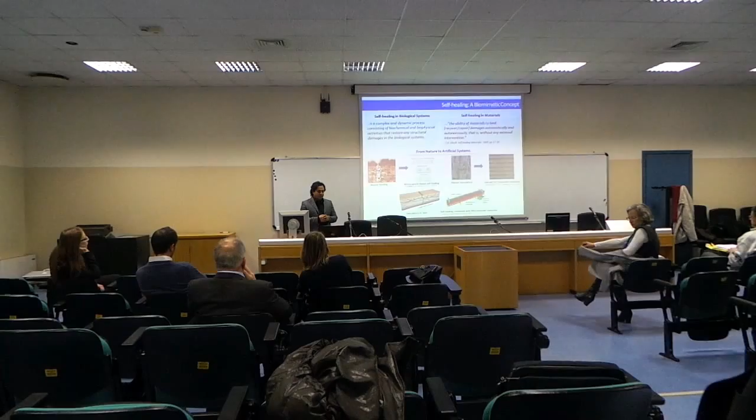So what is self-healing? Self-healing is a biomimetic concept because it's a unique feature in any biological system around us. Self-healing in any biological system can be defined as a complex and dynamic process consisting of different biochemical and biophysical activities in order to restore any structural damage in the system. Scientists have always been interested in replicating this idea to develop artificial systems with healing ability. The ideal definition of a self-healing material could be any material that has the inbuilt capacity to heal any kind of damage without any external intervention.

Over the past two decades, there have been a lot of research works in the scientific community to develop such materials with healing ability.

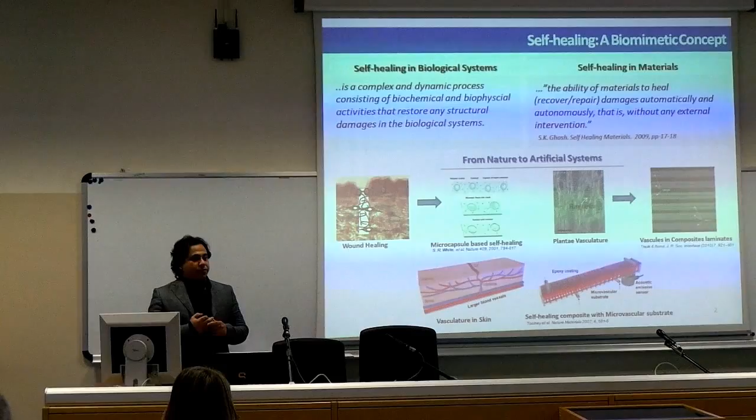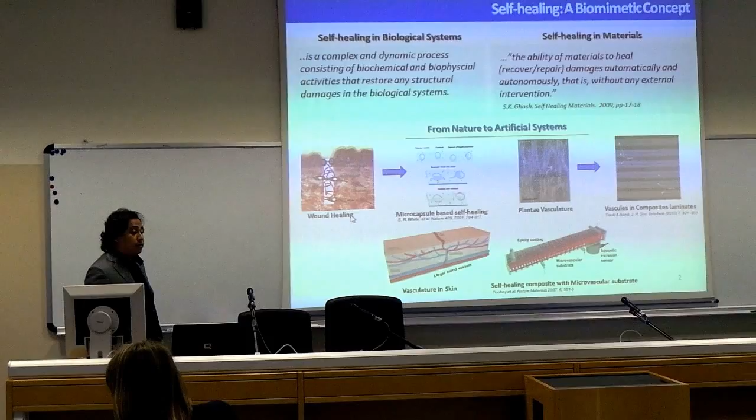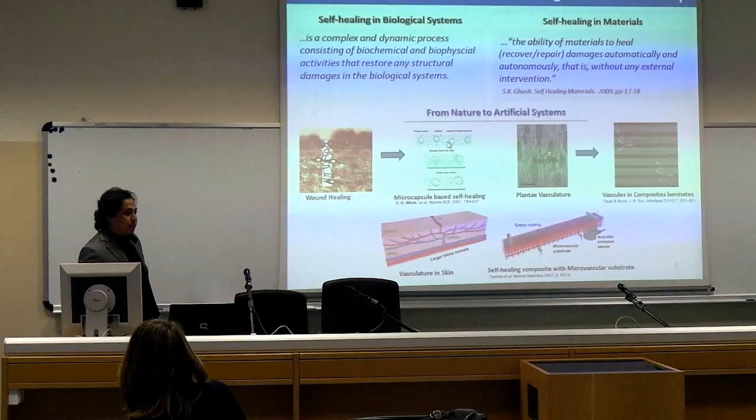For example, Professor Scott White in 2001 first published a work where they wanted to mimic the wound healing mechanism of human bone tissue to develop epoxy-based composites, embedding microcapsules containing healing agents and dispersing catalyst inside the matrix. Upon crack initiation, if the crack breaks the microcapsule, it releases the healing agent, and when it contacts the catalyst, it initiates polymerization at the crack, and this way they self-heal.

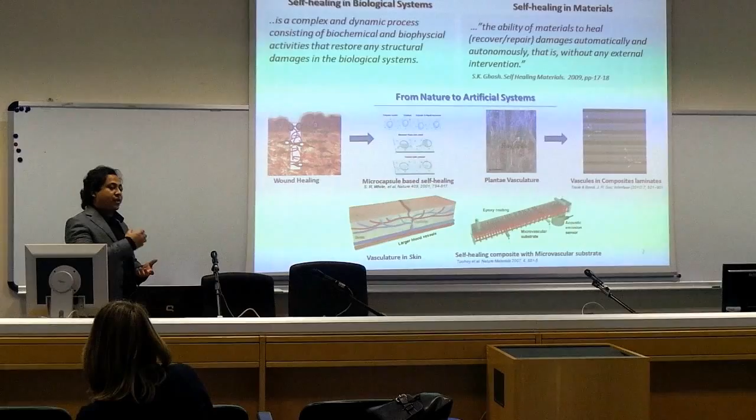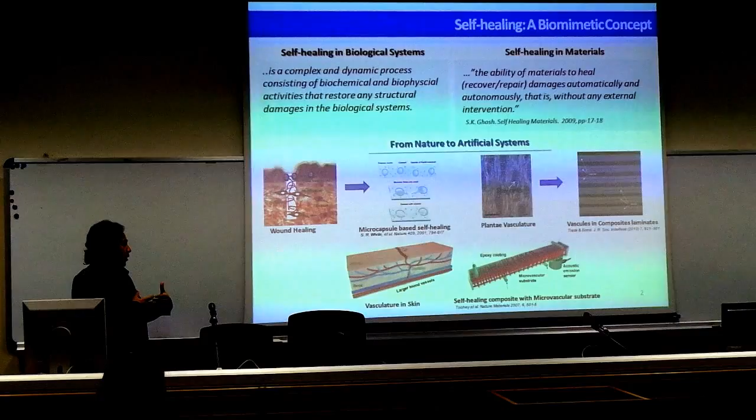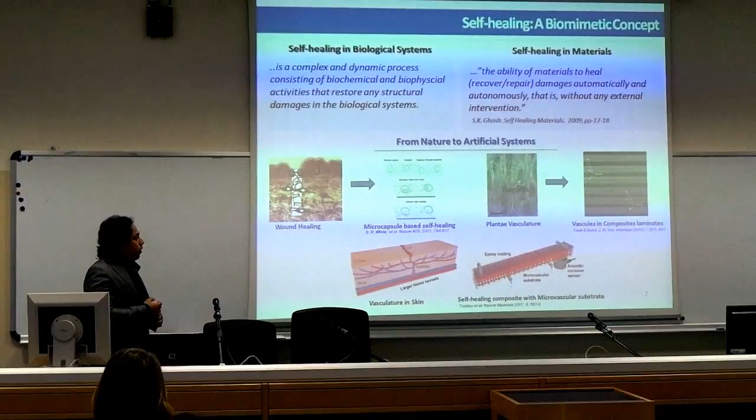Another interesting example is the work done by Professor Ian Bond at the University of Bristol. They tried to mimic plant vasculature to develop composite laminates, embedding hollow glass fiber containing healing agents inside. Upon crack propagation, the healing agents are released from the hollow glass fiber, and thus they self-heal.

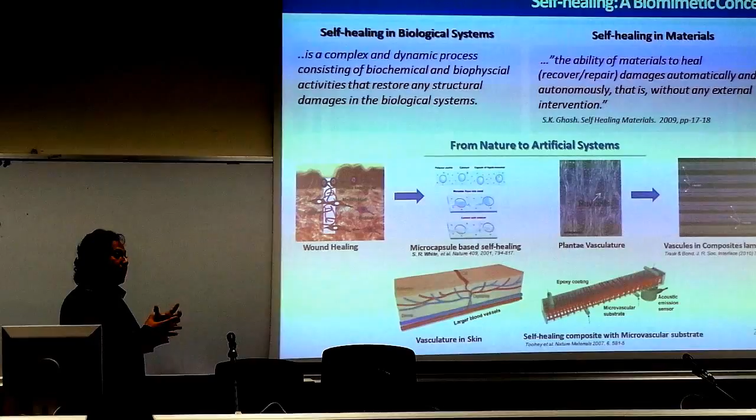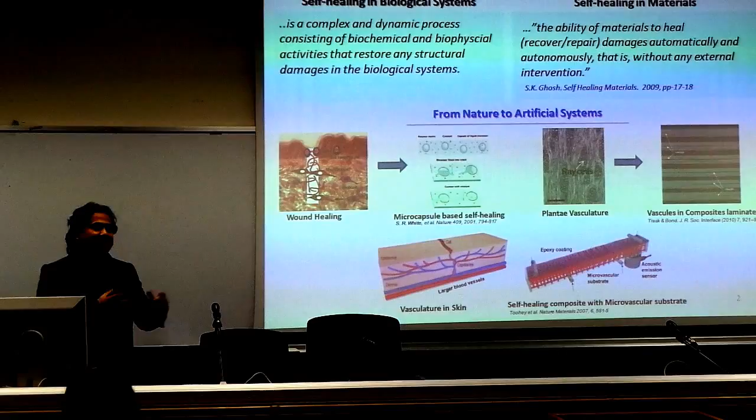Another interesting approach was developed by Professor Toohey et al., who tried to mimic the vasculature in skin, which is the blood vessels under the lower epidermis of our skin. They mimicked this network of blood vessels inside composites by embedding a three-dimensional network of hollow glass fiber. Upon crack initiation, due to internal pressure difference, the healing agents go to the crack and heal it. These are very promising extrinsic type self-healing materials. However, because of their very expensive synthetic route, they are still not very technologically convenient.

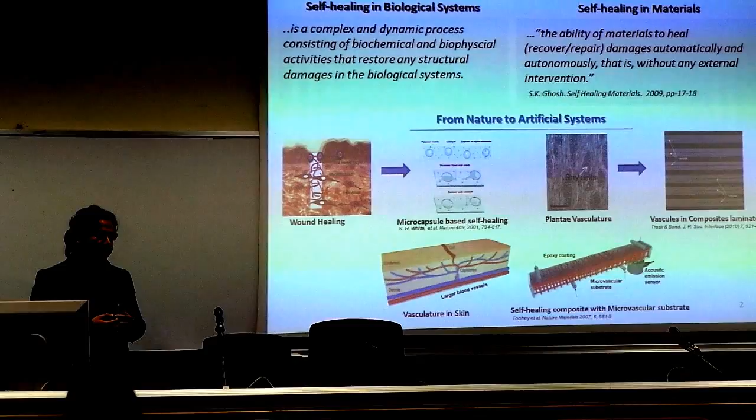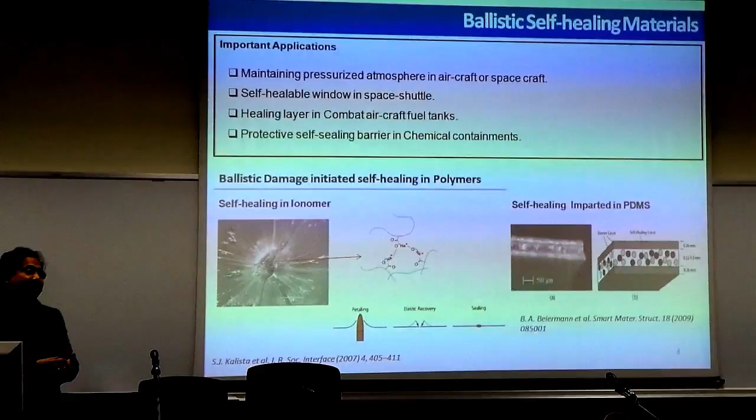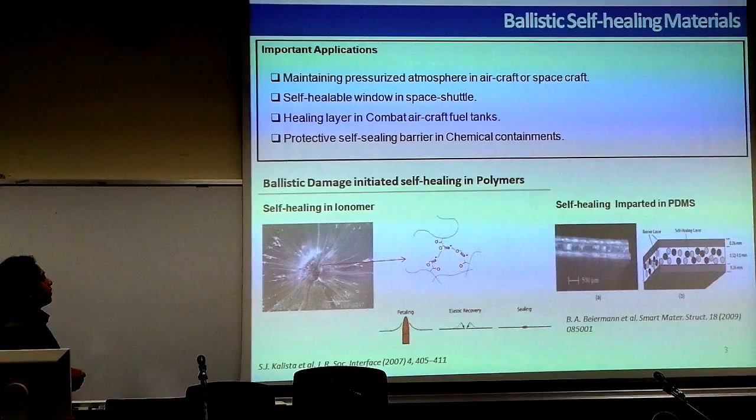There is another class of self-healing material which is ballistic self-healing materials, and I am working on ballistic self-healing materials. Ballistic self-healing materials are a class of materials that can heal very high energy impact damage. This kind of self-healing material can have important applications, like maintaining pressurized atmosphere in aircraft or spacecraft, or being used as self-healable windows in a space shuttle, and so on.

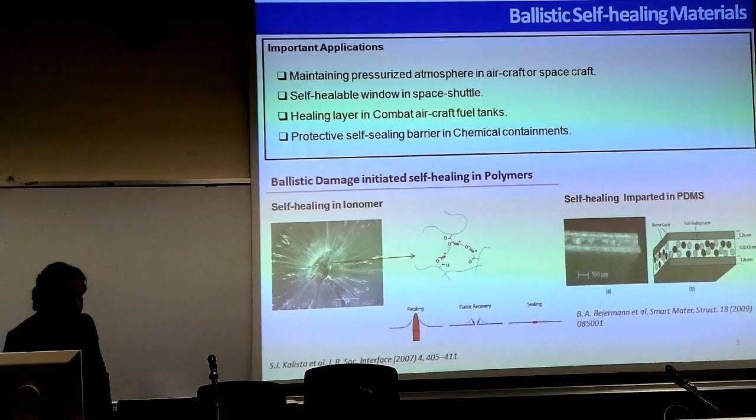The first research work on ballistic damage-initiated self-healing in polymer was reported by Stephen Kalista in 2007. He studied the self-healing behavior in ionomer, and proposed that self-healing in ionomer is actually a function of melt elastic recovery at the impact zone, with complete interdiffusion phenomena at the impact zone leading to complete self-healing of the sample.

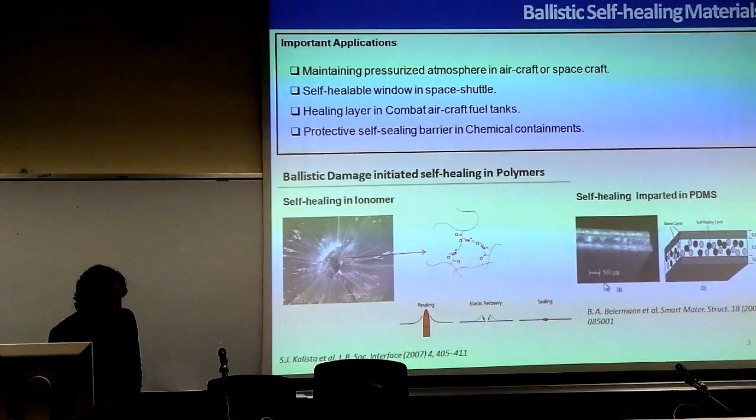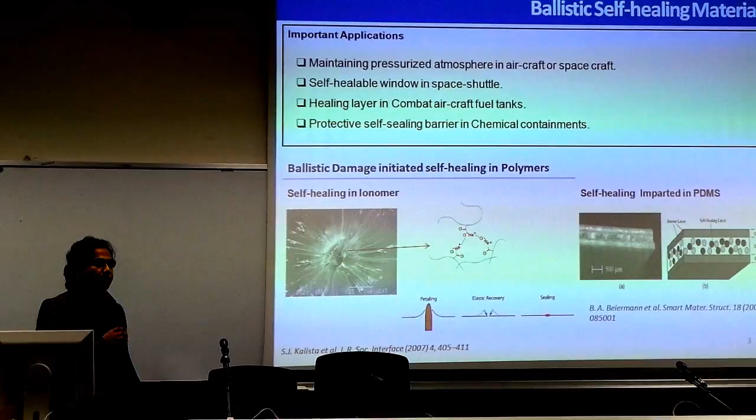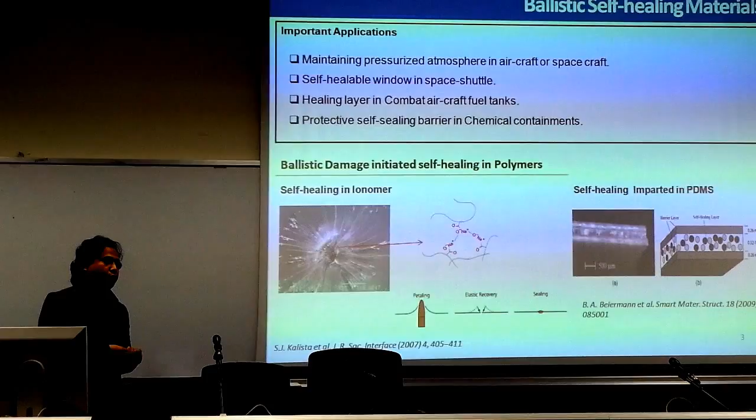After that, there has been very little work to develop such self-healing materials. For example, some efforts have been devoted to developing a self-healing material based on polydimethylsiloxane, where two different types of microcapsules containing healing agents were embedded inside the laminates, and this kind of material exhibited self-healing behavior at very low energy impact damage. However, there is still a search for a technologically convenient approach to develop self-healing materials in order to overcome the technological limitations in present industries.

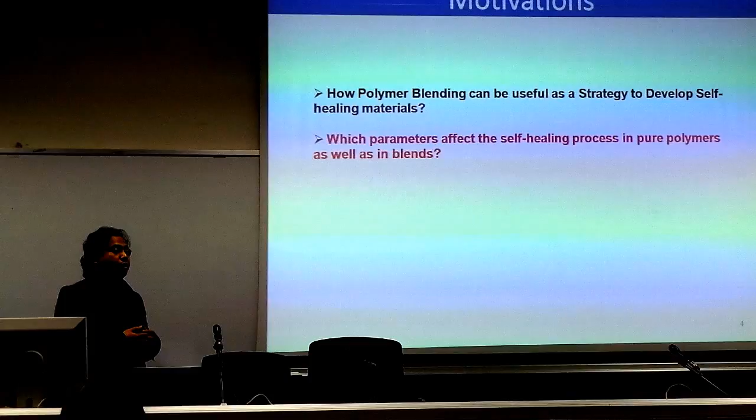So I started working on polymer blending in order to develop self-healing materials. This was my first motivation.

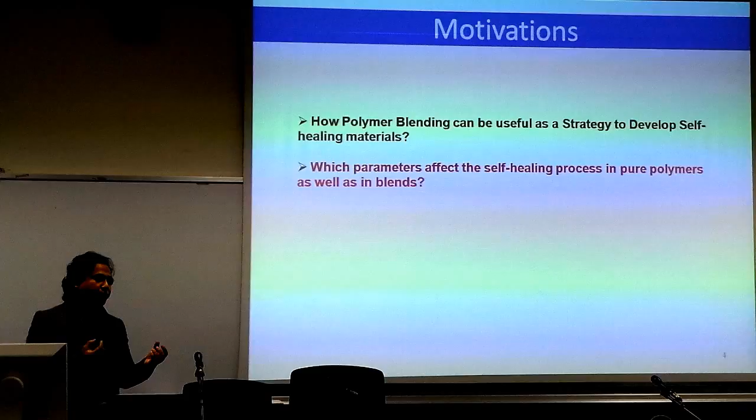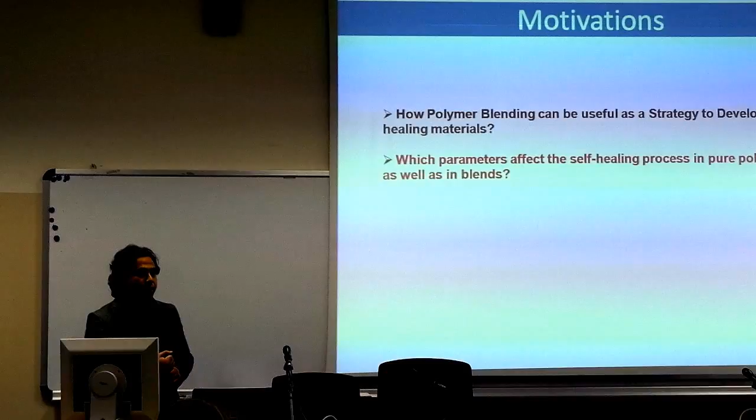As we all know, polymer blending is very useful to develop new materials where you can blend 2 or 3 polymers to achieve a wide range of properties in the final material. The second motivation was to identify different parameters that can affect the self-healing behavior of the pure component as well as in the blend. To do this, I started studying self-healing behavior in the single component system, the pure polymers. I studied self-healing behavior in ionomer, which is the polyethylene methacrylic acid copolymer, and in functionalized elastomers.

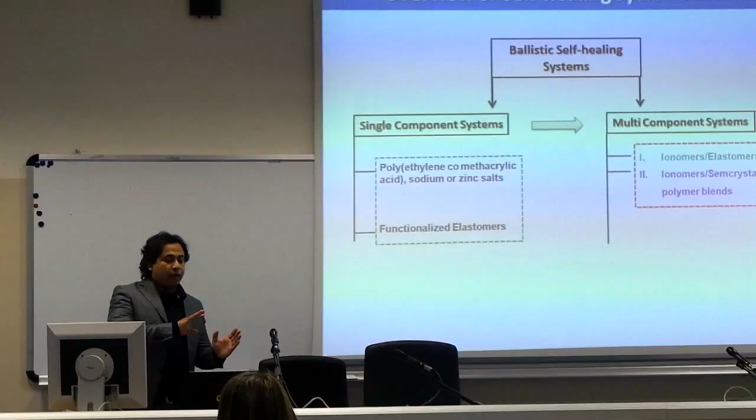After understanding the self-healing behavior in the single component system, I moved toward the multi-component system, where I studied the self-healing behavior in blends: ionomer with elastomers, and ionomer with semi-crystalline polymer.

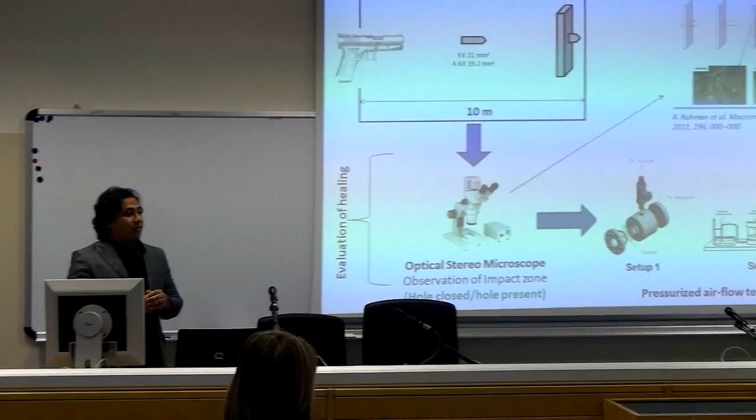Before going into detail about the results I obtained in different systems, I'd like to give you an overview of some important experimental thoughts that were crucial to identify the healing ability of the material and the healing process.

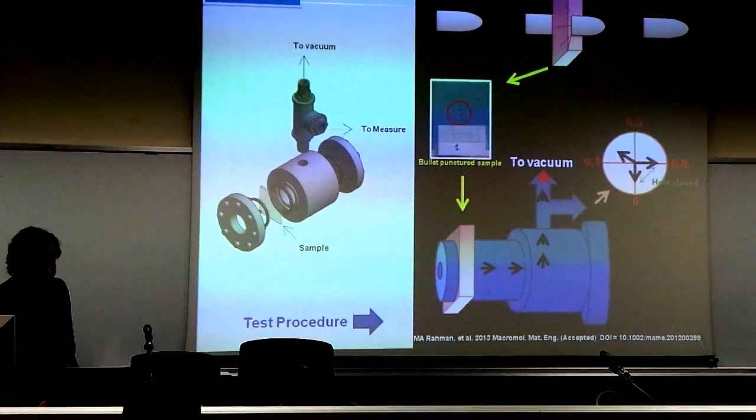I have a manometer. If the sample can maintain a pressure difference of 0.8 bar at the impact zone, it means the hole is closed, indicating healing of the damaged zone. If I observe an immediate pressure decay, it means the hole is not closed, so the material failed to self-heal. The second setup consists of a gas cylinder, a standard pressure vessel, and a water beaker containing water.

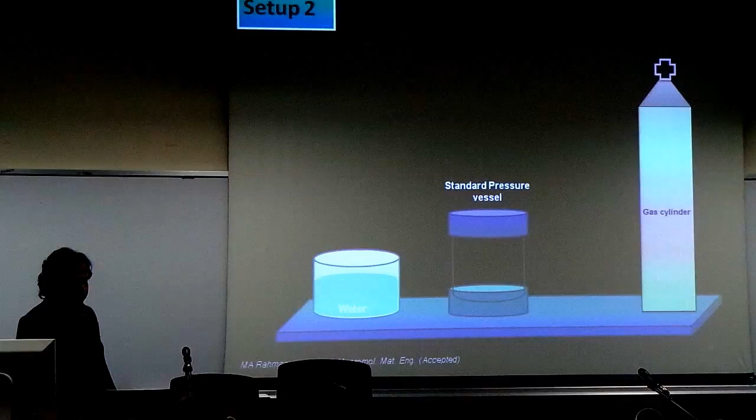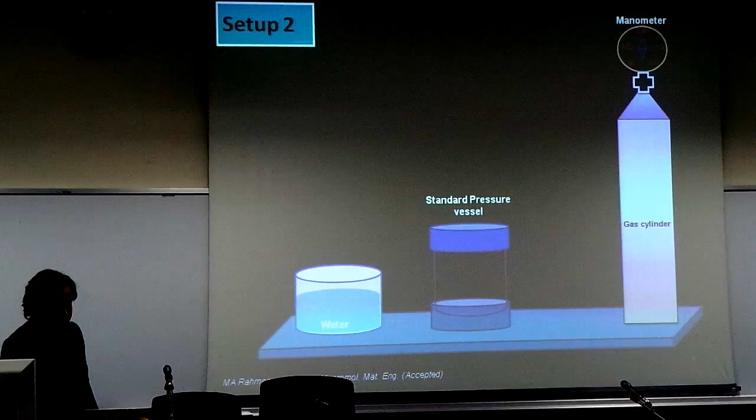In the second setup, I have a manometer where I can use a different pressure difference to identify the healing efficiency of the material. Each apparatus in this setup was connected through a rubber tube.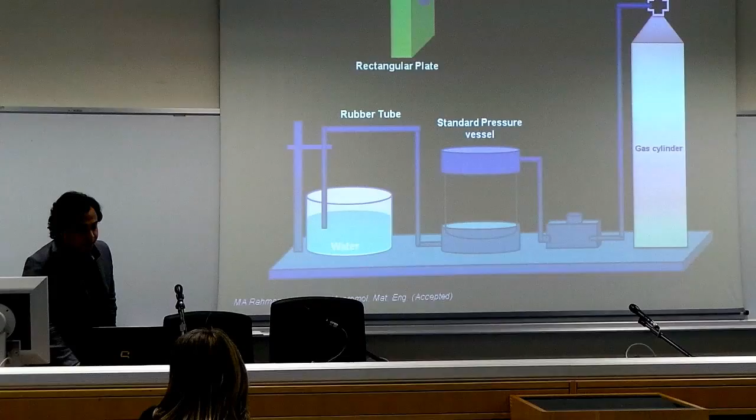Since the basement of the standard pressure vessel is circular, I had to prepare circular samples from the rectangular sample. Then the circular plate was inserted at the bottom of the standard pressure vessel and closed with the upper part of the vessel.

The sample was exposed to a pressure difference for a certain period of time. If the damaged zone is not completely closed, I would see a water bubble immediately in the water beaker. But if it does not show evidence of a water bubble, it means the sample is self-healed.

So these two setups were very important to identify the healing ability and healing efficiency in each sample. Now I'd like to go through some important results in each system. At the beginning, I started studying the ballistic self-healing in ionomers.

I should mention that ionomers are random copolymers containing both polyethylene and methacrylic acid content, where the methacrylic acid content is usually 15 weight percent, and this acid is partially neutralized by trace metal ions like sodium, potassium, or quaternary ammonium ions.

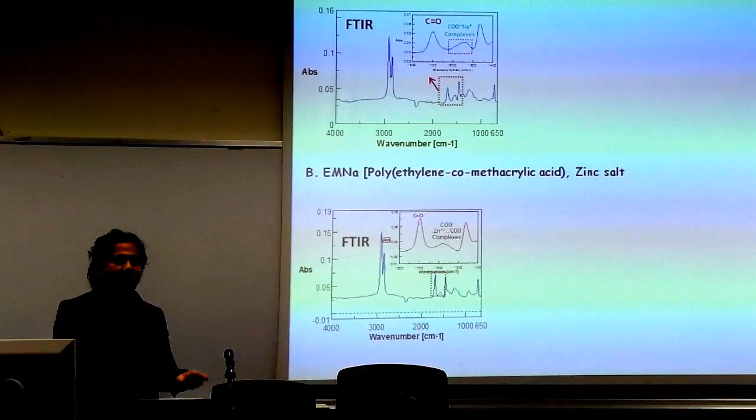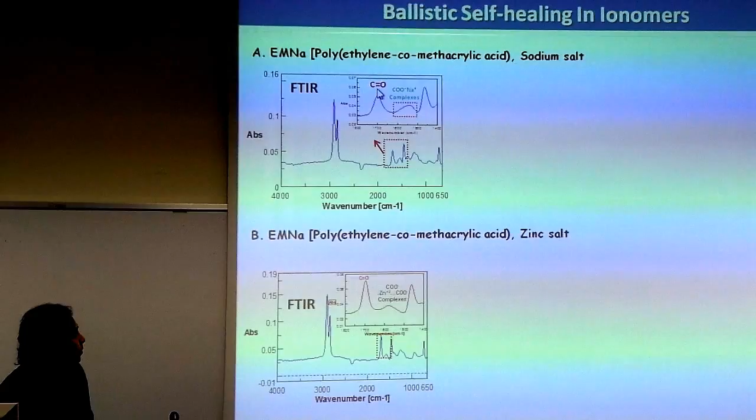I studied two different ionomers, polyethylene methacrylic acid containing both sodium ion and zinc ion. At the beginning, I studied their chemical structure by FTIR analysis. I observed both the ionic aggregates and the carboxylic acid groups, and I should mention that ionic aggregates are very important for the promising thermal and mechanical behavior of ionomers.

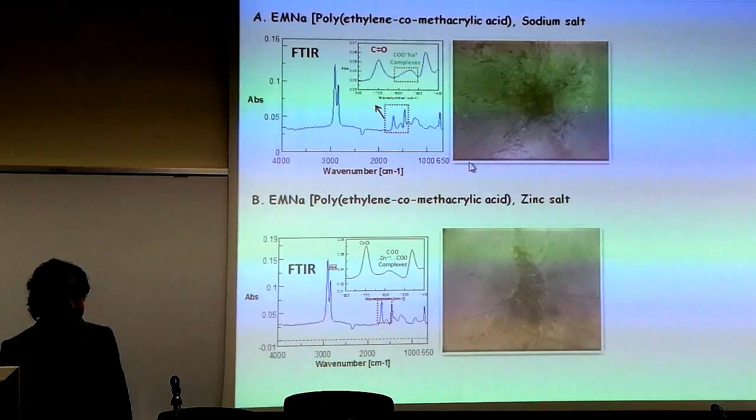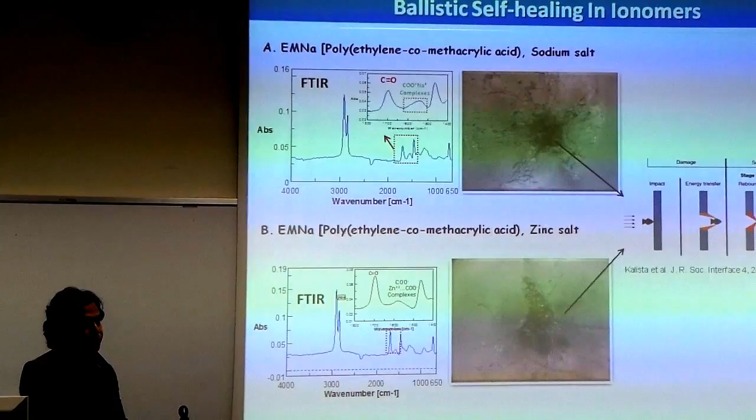I also studied their ballistic self-healing behavior, and in the evaluation test, both showed self-healing as expected. As proposed by Stephen Kalista, during bullet penetration at the impact zone there is a temperature rise at the damaged zone, about 110 degrees Celsius. In my DSC study, I found this is actually 15 to 20 degrees Celsius above the melting point of the pure copolymer.

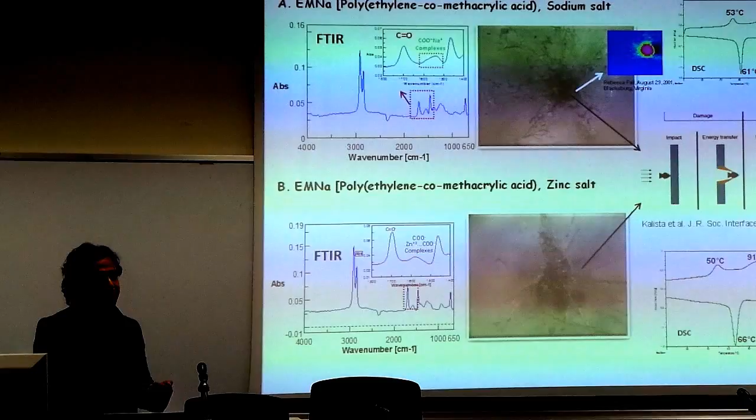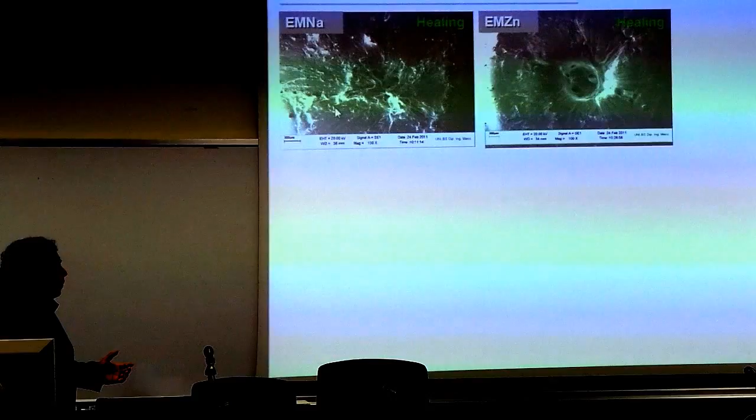If you take a closer look at the impact zone of both ionomers, although their morphology is different, you can see complete interdiffusion and melt flow behavior at the impact zone, which is further supported by thermally activated hydrogen bonding that leads to complete self-healing in the impact zone.

I tried to study further how to evaluate the self-healing ability of ionomer, and I tried to investigate what physical parameters can limit their self-healing ability.

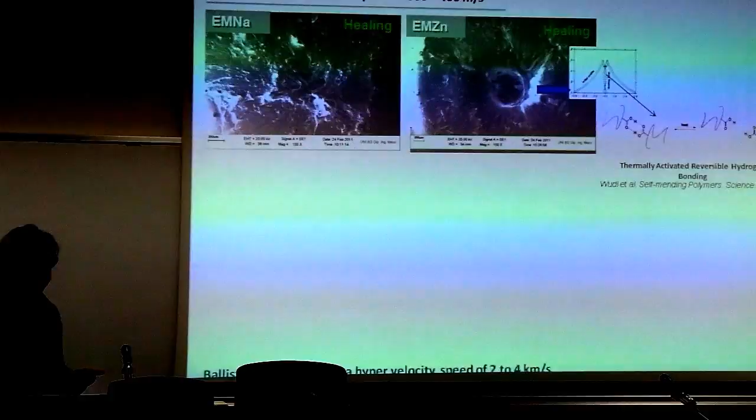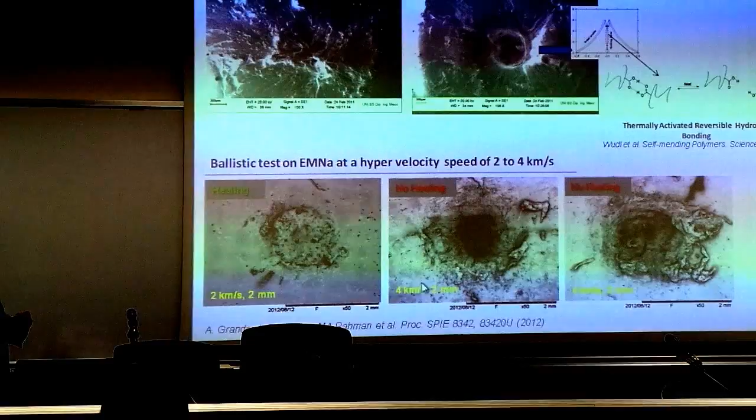In these micrographs, you can see that the ballistic self-healing of ionomer was tested when the bullet speed was 2 km per second. The material showed self-healing. But at other conditions, the material did not show self-healing. That means there are some physical parameters, such as the size and shape of the bullet or velocity of the bullet, that also significantly affect the self-healing ability of ionomer.

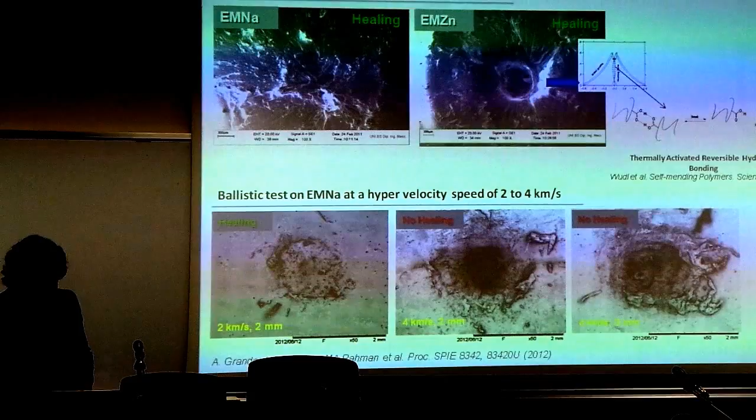I also studied the self-healing behavior in rubber, specifically epoxidized natural rubber. Since this work concerns self-healing in elastomer, I'd first like to give you some interesting information on self-healing elastomers.

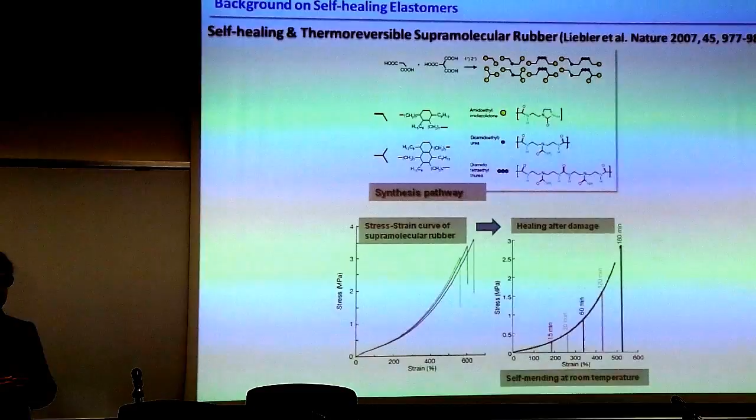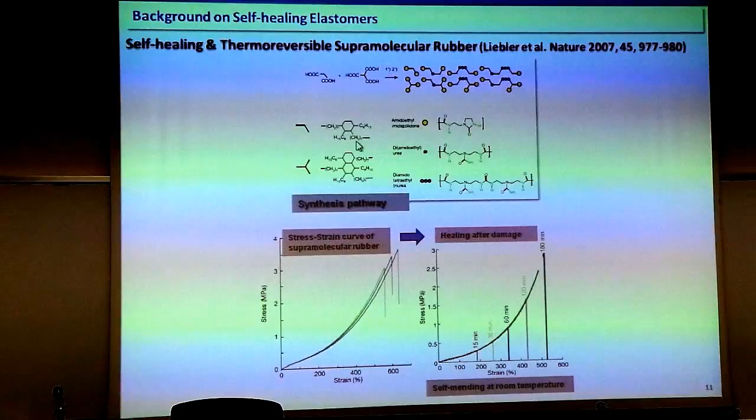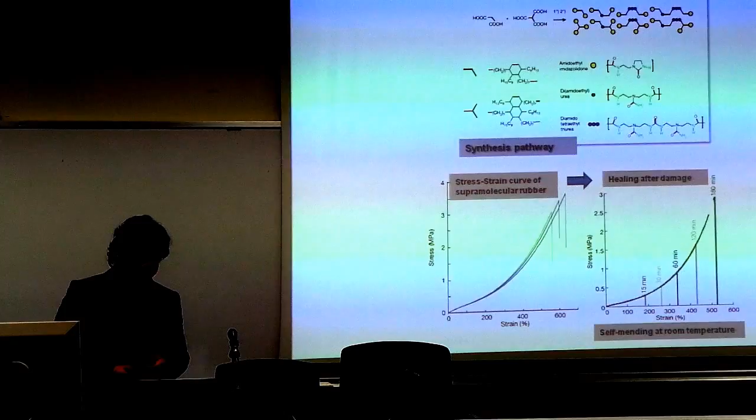The first self-healing elastomer was developed by Professor Ludwig Leibler in 2007. He developed a hydrogen bonded resin using different dimerized fatty acids. He developed a dynamic supramolecular approach to synthesize the supramolecular self-healing rubber, which contains multivalent hydrogen bonding that is individually weak but collectively has a high load bearing capacity, as shown in the stress-strain curve of this pure rubber.

They studied the self-healing behavior by cutting the sample in the middle and putting it back together just by pushing by hand. After 180 minutes, the sample showed 90% recovery of its original strength.

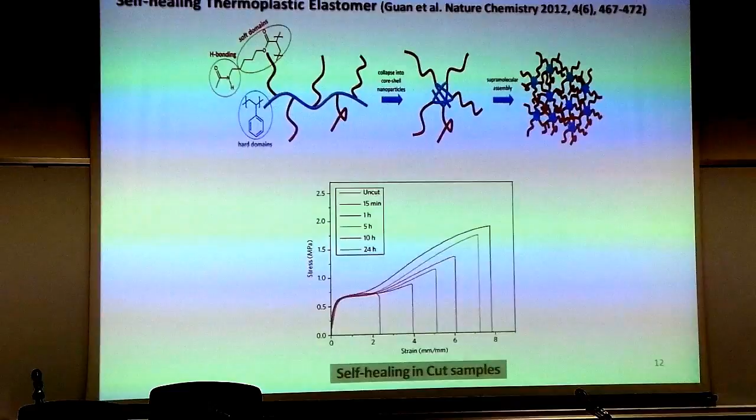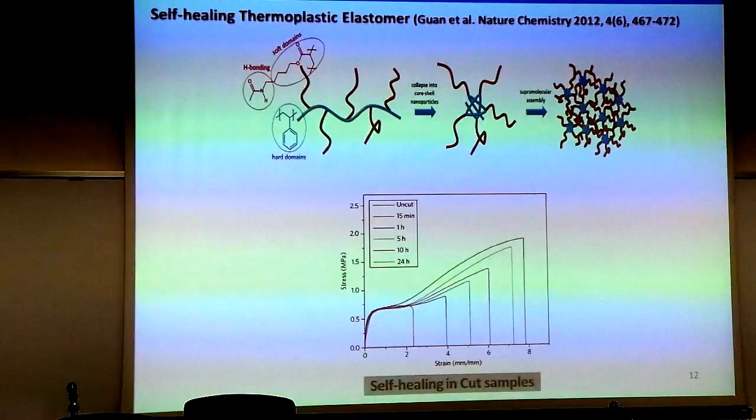Another research work by Professor Guan was recently done to develop a multiphasic thermoplastic self-healing elastomer, using polystyrene as hard domains and polyacrylamide as soft domain. Due to the presence of hydrogen bonding in the material, it shows a supramolecular self-assembly that leads to self-healing of cut damage in the sample.

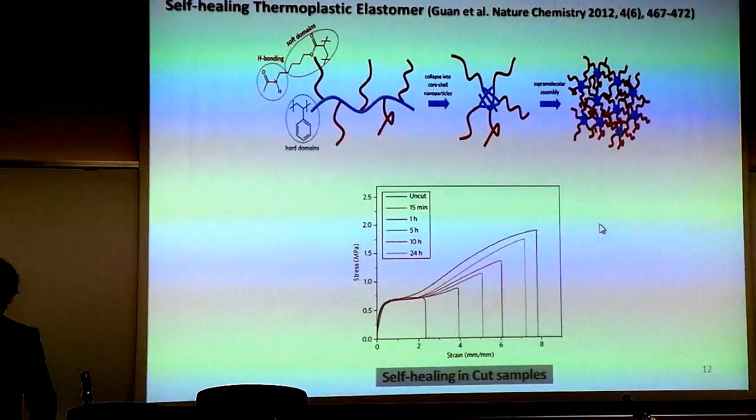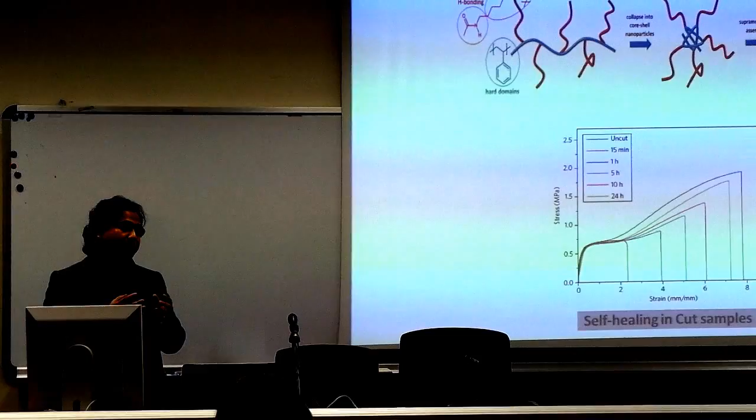They studied in the same manner the self-healing behavior of the rubber by cutting in the middle, and after a certain period of time, they found that the material can recover almost 90% of its virgin strength. However, I should inform you that most of the work on self-healing elastomer was done using supramolecular chemistry, but no work has ever been reported on the self-healing behavior of conventionally synthesized elastomer.

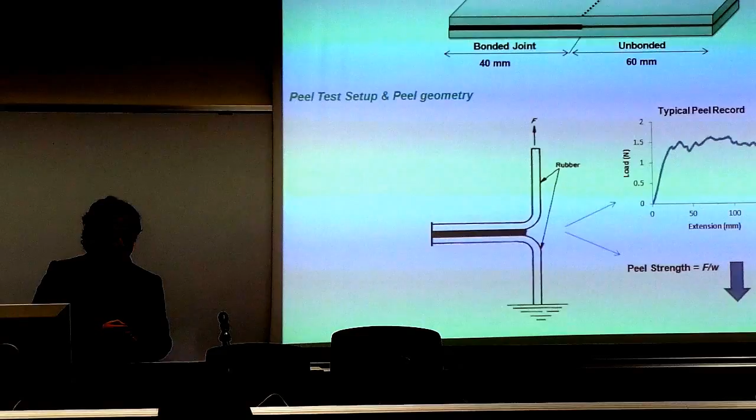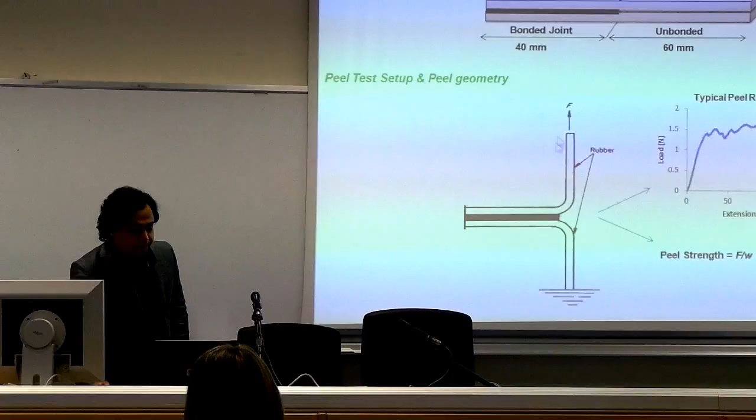This is why I studied the self-healing behavior of epoxidized natural rubber. Since the epoxidized natural rubber at room temperature is very sticky in nature, I tried to understand their adhesion behavior. To do that, I performed the peel test, which is a conventional way to understand the adhesion strength in the rubber. You can see the generalized sketch of the peel specimen, and the peel test was done in T-peel geometry. This is the typical peel record that I obtained from the peel test, and peel strength was calculated from this peel curve.

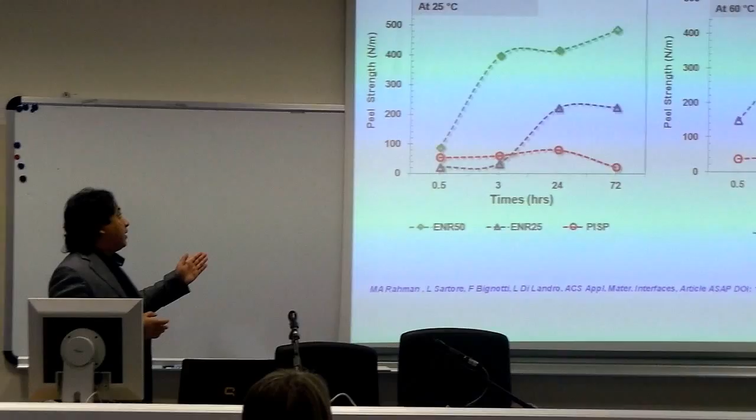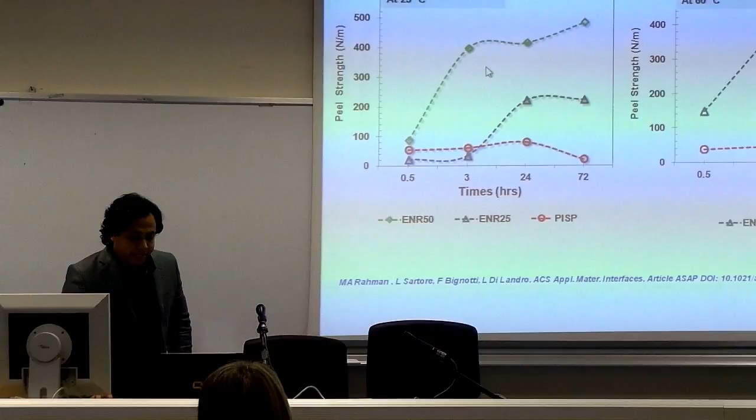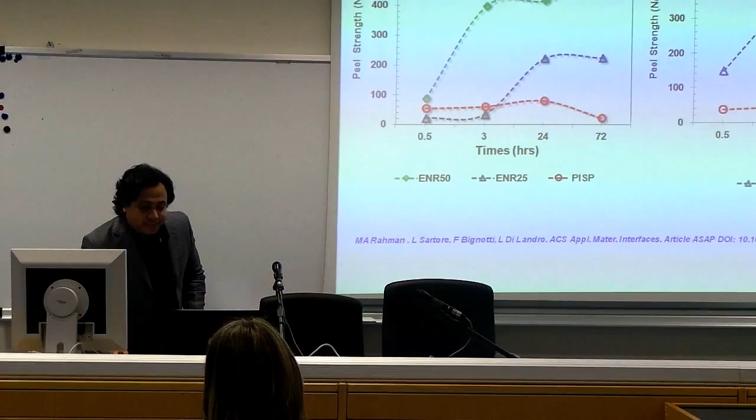This slide presents the peel strength of rubbers. I should mention that peel specimens were treated at two different temperatures, at 25 degrees Celsius and at 60 degrees Celsius, for different periods of time. So the peel strength reported here is a function of time and temperature. At 25 degrees Celsius, the highest peel strength was exhibited by ENR50. When I treated the sample at 60 degrees Celsius, the material showed higher peel strength than the material treated at 25 degrees Celsius, and you can see that the peel strength of ENR50 is absent here.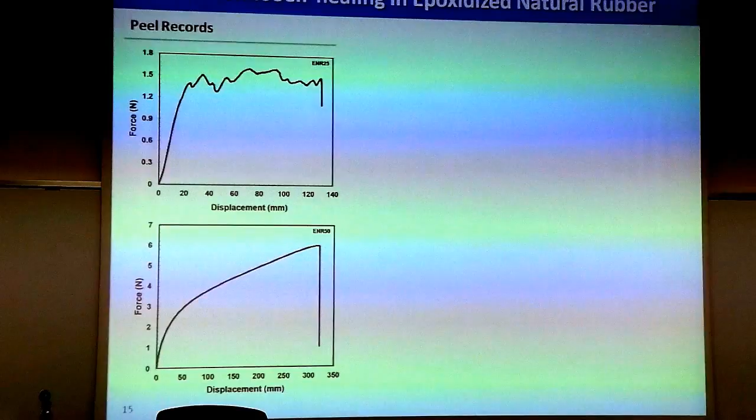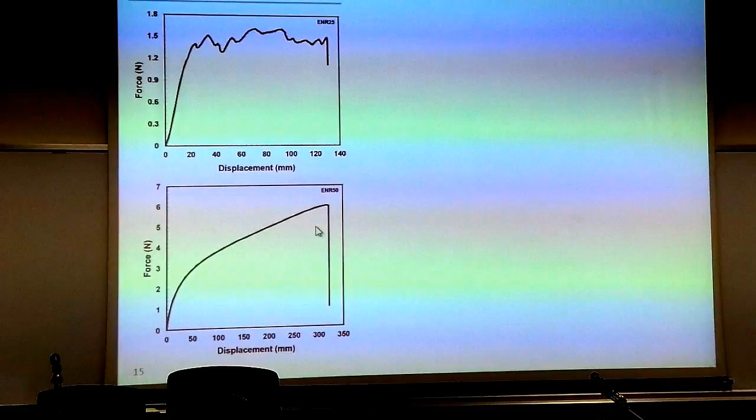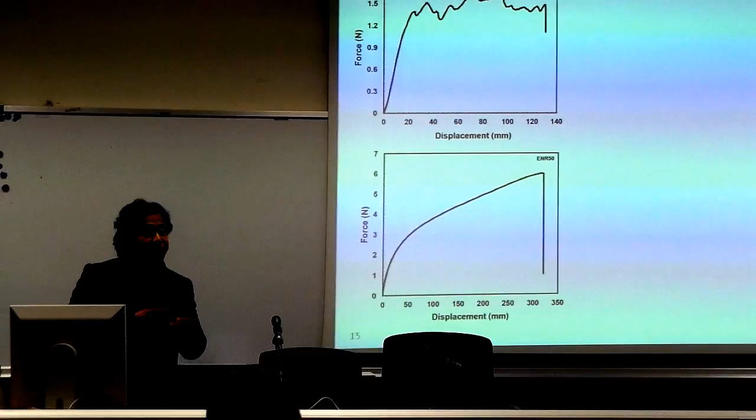This is because when we treated the sample, for example the ENR25 sample having 25 mole percent epoxidation, I treated it for 30 minutes at 60 degrees Celsius, and in the peeling test, this is the typical peel record for ENR25. But at the same condition, the ENR50 showed a different peel record, which is more like the stress-strain curve for the ENR50 sample. This behavior can be ascribed to the complete cohesion at the interface of the peel sample.

This strong cohesion is not only supported by the interdiffusion of the sample, but the interaction among polar groups can also play a significant role. I should mention here that I did not synthesize the epoxidized natural rubber in the laboratory; this was a commercial epoxidized natural rubber.

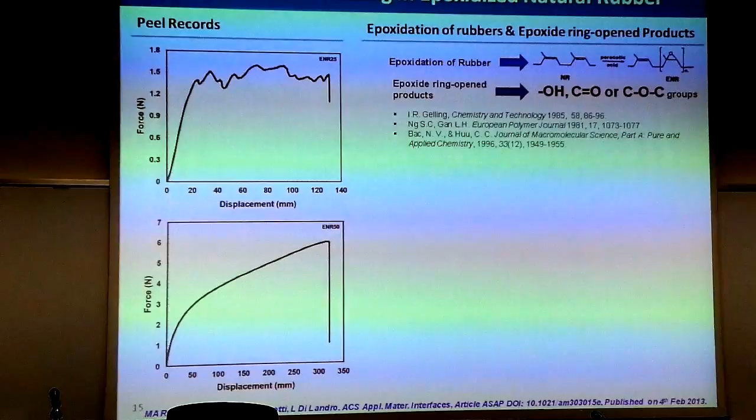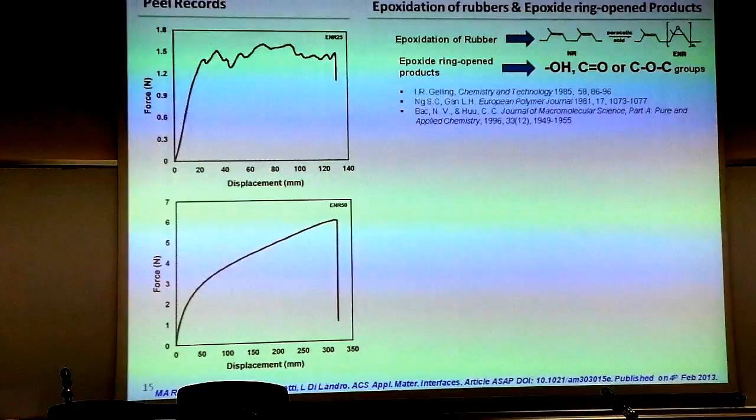But in the literature study, I found that during the epoxidation of rubber, due to the high concentration of acid, or very low pH, or very high temperature, or even if the synthetic route is very long, it gives epoxide ring opening products, which can be identified in the sample by the presence of hydroxyl group, carbonyl group, or ether group.

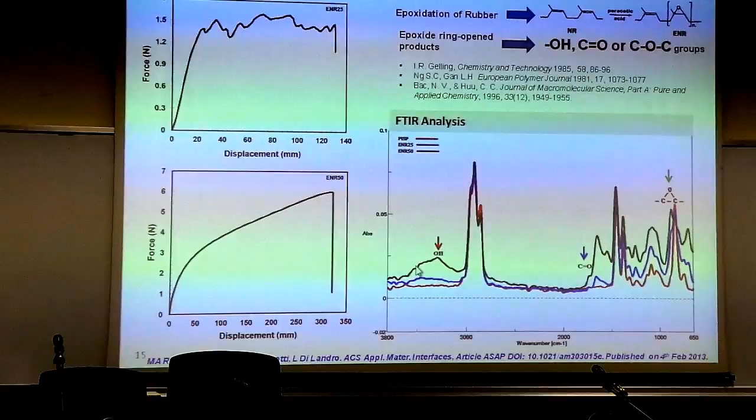In the FTIR analysis of my sample, I found that in the FTIR spectra of ENR50, it shows the presence of some polar groups like hydroxyl group, carbonyl group, ether groups, and also the epoxy group. This gives further indication about the importance of having higher mole percent epoxidation and also the presence of polar groups that can lead to the higher peel strength in ENR50.

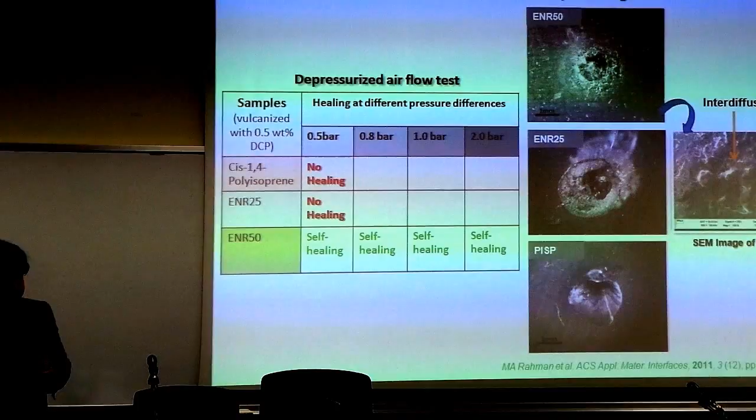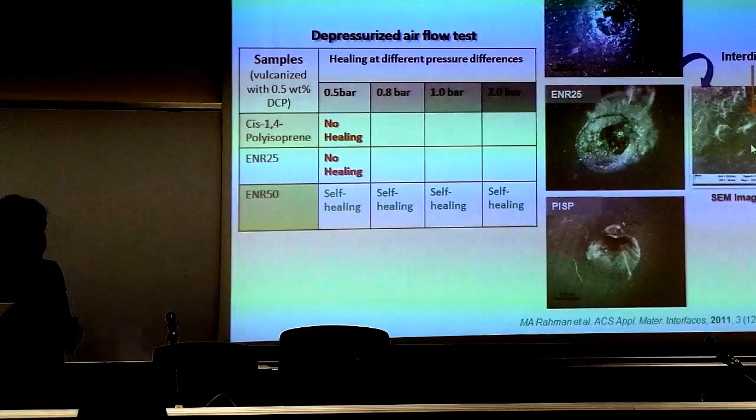I also studied their self-healing behavior in ballistic test conditions, and I found that only ENR50, having 50 mole percent epoxidation level, showed complete self-healing behavior. If you take a closer look at the impact zone of ENR50, it shows complete interdiffusion at the impact zone.

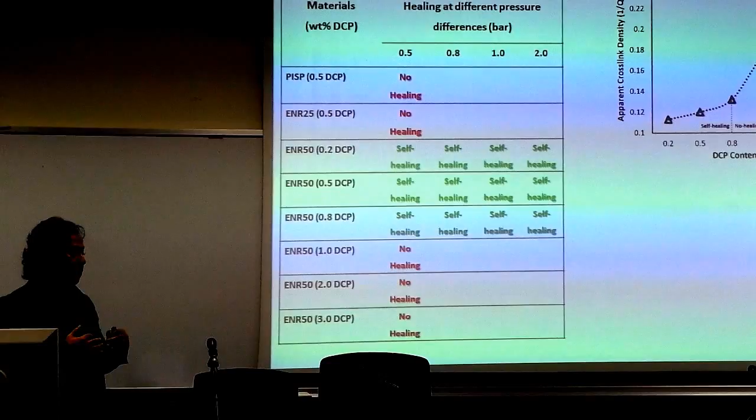Since this interdiffusion behavior is largely influenced by the mobility of macromolecular segments in rubber, I tried to understand the effect of the crosslink density of rubber on their self-healing. So I vulcanized the rubber with different amounts of dicumyl peroxide. As you can see in this plot, the crosslink density of rubber is a function of dicumyl peroxide content; as we increase the dicumyl peroxide content, the crosslink density increased.

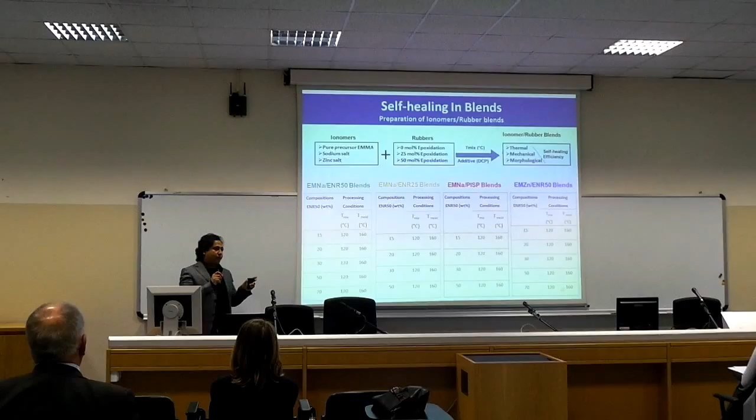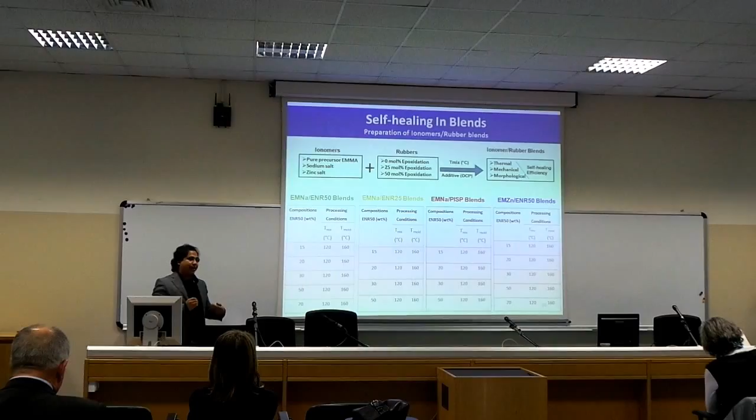In the ballistic ionomer blends, I actually studied two different kinds of ionomer blends: ionomer with elastomer, and ionomer with a semi-crystalline polymer. The strategy was to verify the effect of both phases, the ionomer phase and the rubber phase. In the ionomer phase, the variables were the copolymer that does not contain any ion, meaning the acid content is not partially neutralized, and then I used sodium and zinc, which are monovalent and divalent cations, in the ionomer phase. In the rubber phase, I tried to observe the effect of different epoxidation levels. In the final product, we have a wide range of thermal and mechanical properties with different levels of healing efficiency.

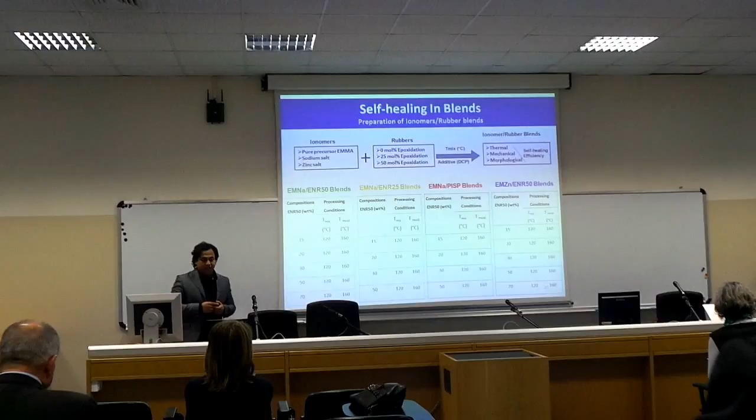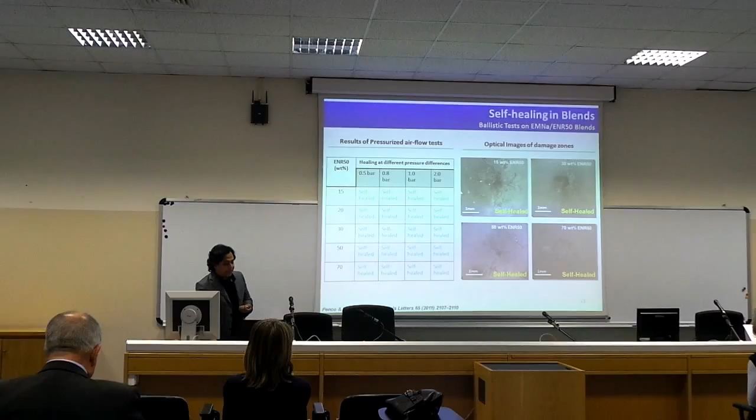At first, I studied the pure copolymer and ionomer and epoxidized natural rubber 50 blends. You can see that in the pressurized airflow test, all the compositions showed self-healing behavior, irrespective of their processing conditions. In the sodium ionomer and rubber blends, I also observed complete self-healing with high healing efficiency at each composition of the blend. However, when I blended zinc ionomer with epoxidized natural rubber...